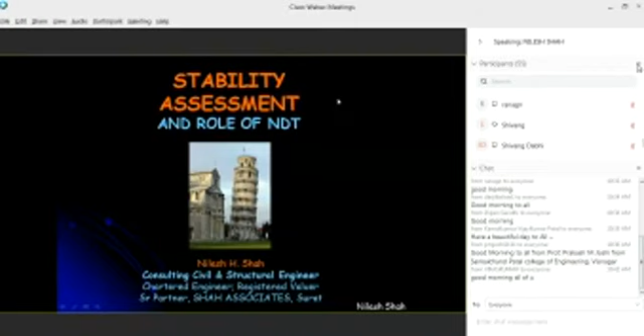So out of the 30% of the surface of the earth which is covered with land, barely 50% of that part is inhabited. So whatever efforts we are making for environmental conservation are restricted to barely 15% of the total surface of the earth, absolutely disregarding the 70% part which is covered by water. And the ecology of the ocean is very important. So I would like to convey to all of you: please strive hard to conserve the environment by conserving the water also, because it plays a great role in ecological balance.

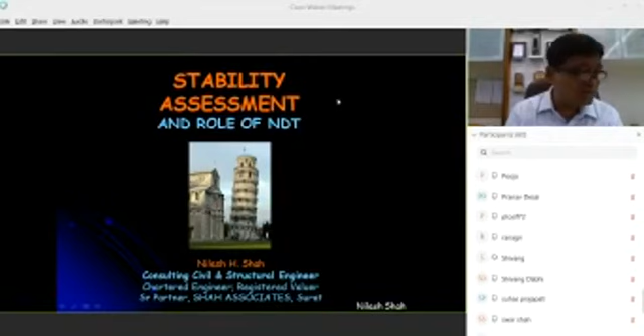Individually also we can start conservation of water so that we can have a good ecological balance on the earth. Global warming and other phenomena are related to the ocean. So if we try hard to contribute in whatever small way, I feel we should be able to conserve the water, the ocean, which covers 70% of the earth. More important is that life started in the ocean.

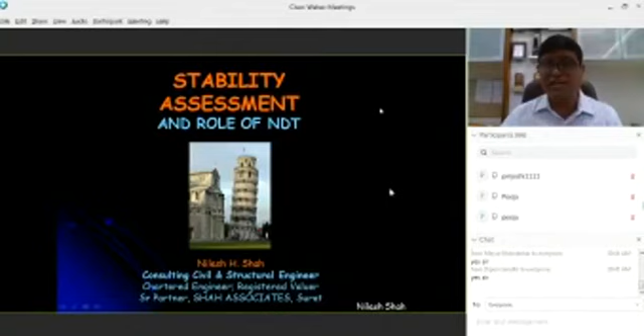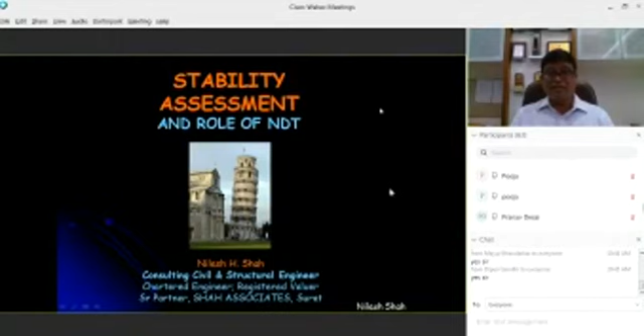So the first thing which I would like to emphasize is that structures also have emotional attachments. They are also like human beings. They get older like we get old. They get sick like we get sick. They also need periodic checkups. They also need regular treatments whenever they fall sick, and they may also be placed on life support. Structures will maintain good health only if we care for them. Otherwise, if we neglect them, they would be like a child which is not under the control of its parents. So it is very important that we focus on the well-being of structures during their useful lifespan.

Now, why is this type of assessment required for buildings? I have listed down some of the parameters. These are the phases calling for actual assessment of a building. You may call it stability assessment, you may call it structural condition assessment of a building. These situations will call for this purpose. One is sale and purchase of a building. Whenever I am going to purchase a building, I must try to find out, though the building is 20 years old, whether it befits the requirements of health and safety or not.

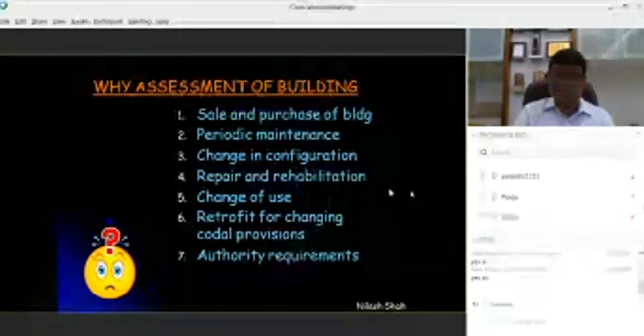Periodic maintenance: nowadays the government has also made it compulsory that any reinforced concrete building more than 15 years old should get periodically inspected every 5 years or every 3 years, and a certificate in the form of stability or structural inspection should be obtained, maintained in record and submitted to the local authority. I understand that all over Gujarat this is the scenario: any RCC building more than 15 years old should have a structural inspection every 5 years and submit a report along with a stability certificate to the local authority. I hope people from other states are also joining this webinar. I am sure the situation in other states would be the same.

Whenever there is a change in configuration, like people may want a horizontal expansion or a vertical expansion of the building, that is what we call change in configuration of the building. At that time also the assessment would be required. Repair and rehabilitation: over a period of time there is degradation in the materials used in the building. There may be a change of use, so under all those circumstances you would certainly need to assess the structural condition of the building.

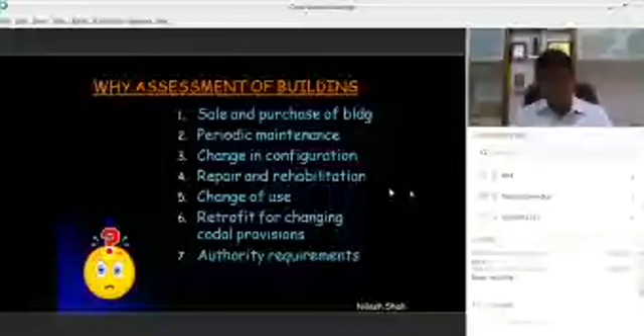Retrofit for changes in codal provisions. Though the building has not deteriorated, though the materials are performing very well as of today, they were constructed 15 years before, complying with the code of practice prevailing at that point of time. Now the codes have been revised, especially post-earthquake. There is a lot of emphasis on revision of codes for earthquake and wind, as well as IS 456. So current provisions of the codes will call for retrofitting of all those buildings constructed considering the old codes.

For example, if I just put it straightly before you, buildings which are constructed with M15 grade of concrete were correct at that particular point of time because M15 was accepted as a structural concrete. Now, over the last few years, with introduction of changes in relevant codes, the minimum structural grade of concrete has been declared as M20. So this certainly is a matter of concern for all those buildings which have been constructed complying to the old codes of practice.

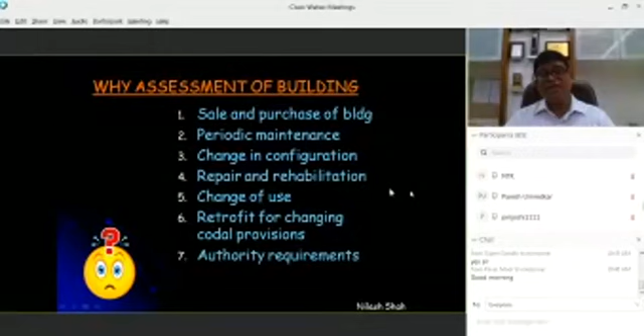And as I told you, one reason would be the requirement of the authority, because nowadays they demand that every 5 years you should have your building inspected and you must submit a certificate of stability. So now, coming to this particular aspect, a stability certificate. I have seen that many structural engineers were involved in this type of work and were demanded a certificate of stability, especially after a havoc situation was created or whenever some kind of natural disaster takes place.

I'm talking about the 2001 Bhuj earthquake, because immediately after that, a lot of people have been very much worried about how their building will perform, and the authority has also declared that we must obtain a stability certificate of all the buildings in Gujarat. So, what actually is this stability certificate, or what exactly do we mean by stability? That is what I would like to ask.

So, if you would like to share your thoughts on what is stability of a building, or what do we exactly mean by stability, you can write that in the chat box, or communicate to us in any other form. What are your ideas when we exactly talk about stability? What comes to your mind? So one is saying life expectancy. Avi Gandhi has said that. Other people can also share their ideas. When we try to assess the stability of a structure, what exactly do we mean by that?

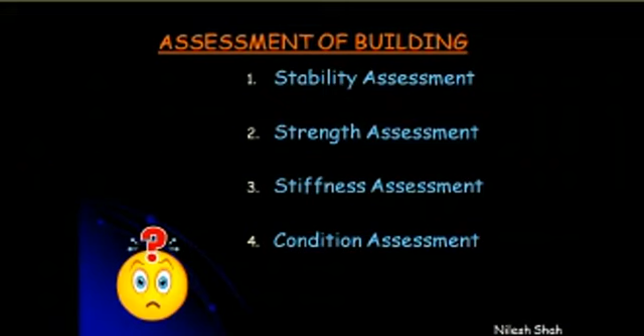So the general concept and the idea during those days was that a building has maintained its posture over so many years of time in the life which has passed for that particular building, and therefore it is stable.

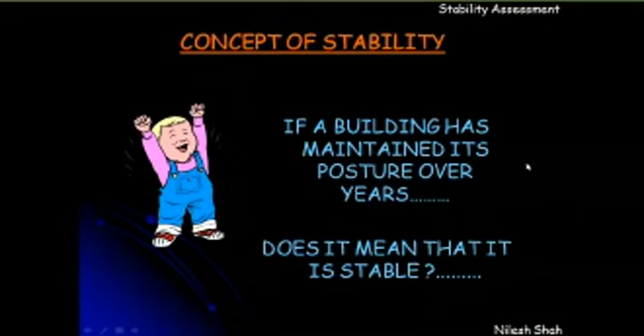So let us go and inspect the building. If there are not significant damages that you find in terms of cracks or dilapidation or kind of loose cover concrete or reinforcement rusting, go and certify the building as a stable building. Do we all mean that it is a stable building just based on these particular criteria and visual inspection? Then I have a very big question for you.

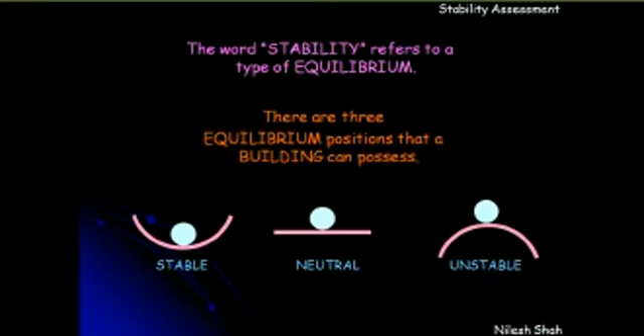No doubt about that. But the point of concern for engineers is that the equilibrium position which it has occupied is the third category, which we call unstable form of equilibrium. Right? So what we need to do is get rid of this unstable form of equilibrium because it is a great compromise with safety that we refer to in our codes of practice. So now just get back to the basics: what is a stable form of equilibrium?

So whenever a force is applied on a particular structure, the structure or its component will undergo certain types of deflections or deformations. And when the force is removed, it will regain its original position. It will regain its original geometry, right? So that we call a stable form of equilibrium, which is very much preferred in buildings at all times. That is what the code has said. And that is what we mean by stability.

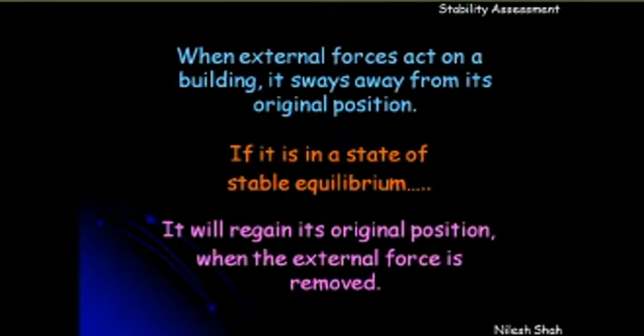When we say stability assessment, we mean to assess that the building would remain in a stable form of equilibrium throughout its lifespan and should not cross over to a neutral type of equilibrium or an unstable type of equilibrium. I'm sure that we are talking about something which is very relevant, very easy, very basic, very conceptual. But people would have missed it the way it is to be considered, or the way we will be discussing in the next few slides.

See, one should keep in mind that the building tries to occupy a new state of equilibrium whenever a force is applied to it, right? For example, if it is in a stable state of equilibrium and you apply a force, the building will remain in the stable state of equilibrium, right? Or it may cross over to a different form of equilibrium, which could be neutral form of equilibrium, or it may cross over to unstable form of equilibrium.

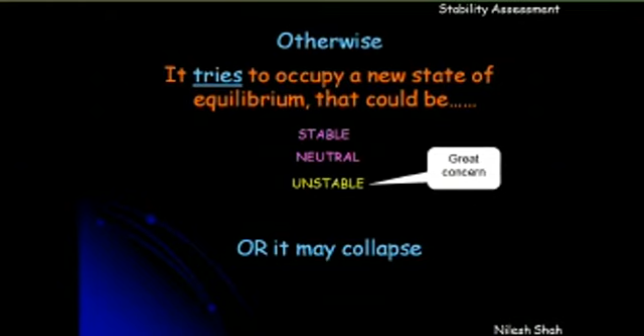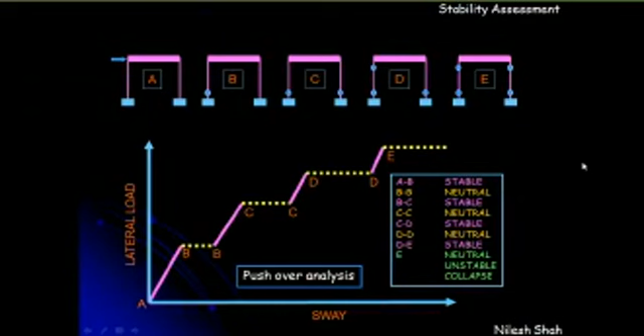So this is what I wanted to highlight: like us, who face highs and lows in our life, buildings also face different situations, sometimes high, sometimes low, in terms of equilibrium, and we must ensure at all times it remains within stable equilibrium without crossing over to unstable equilibrium, which is a great concern for all structural engineers.

Now, how does a building lose its stability? We are not talking about strength or stiffness of the building, we are purely focusing on stability. You must have come across several collapses of buildings, read about them in the newspaper, or seen photographs on Google. A building can lose its stability in two ways: one is local instability, the other is global instability.

Local instability could be in terms of individual members. I have seen several buildings where only a slab collapses. For example, in a 5-storey building, one slab component on the ground floor will collapse. That is local instability. Sometimes a drawing room slab on the 6th floor will collapse because someone was doing breaking work or making a flooring there. That 6th floor slab falls on the 5th floor.

Because of that impact, the 5th floor slab also collapses, and subsequently all the slab panels from the ground floor to the floor where the collapse initiated. But this still falls under local collapse because of local instability of individual members. It could be collapse of beams, slabs, water tanks, or sometimes cantilever projections. Cantilever balconies are more prone because they are subjected to weather effects, and deterioration takes place faster.

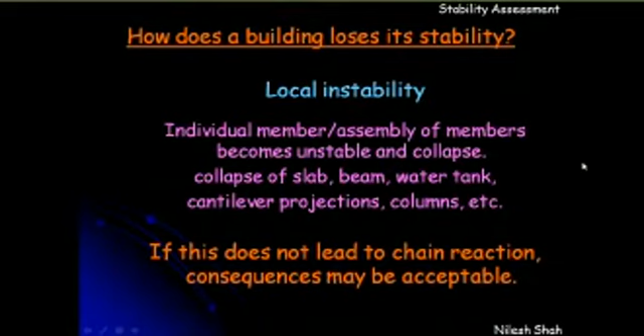But we have to be very careful about this, because we have come across buildings wherein the terrace floor water tank has collapsed onto the terrace slab, leading to collapse of the whole building, because sometimes the slab spans are so huge that it will also affect the columns which are on the perimeter of those slabs, and it will lead to collapse of the columns also, right? So this is one part, how the buildings can get the local instability.

The other is global, which is actually progressive collapse of individual members or assembly of members leading to collapse of the whole building. In fact, the two-dimensional frame which I had just discussed with you was an example of a progressive collapse analysis. And as you all would have heard the word pushover analysis, that was nothing but a pushover analysis. Whatever we have been doing has been only within the domain of elasticity and a linear stress-strain relationship.

But this pushover analysis will prove to you, including the graph which I had shown you, first phase, second phase, third phase, fourth phase, because the stiffness changes. So all actual behavior of a building during progress of a collapse would be non-linear, even though we do all our analysis assuming that stress is directly proportional to strain, or that everything follows the rules of elasticity. Because as soon as a hinge forms, the lateral stiffness will change.

As soon as the stiffness changes, the P-delta behavior will take on the nonlinear form in segments. So what we do is a non-linear analysis in segmental forms, and each segment of that analysis will pertain to linear analysis, and we'll stick to all the assumptions that we have made. So that was actually a basic explanation of the pushover analysis also, when I tried to explain progressive collapse to you.

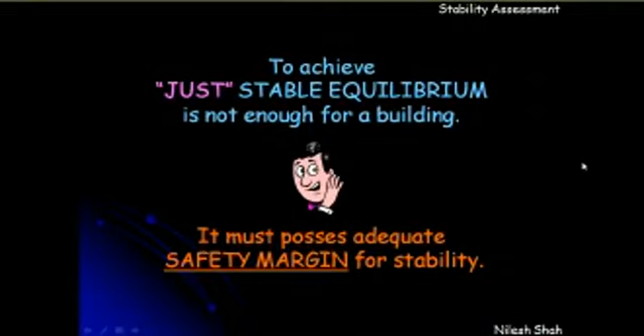How do we find out that a particular building is, I mean, currently authorities also demand, or academicians also say, that the building should be stable. Okay, but how stable it is? Is there a criteria to find out whether a particular building is more stable than the other building? It is there. The criteria is there in academics, the criteria is there in codes of practice, but seldom we try to find out the quantification of stability.

I bet with all of you, I am sure that all of you would be using all latest softwares like ETABS, STAAD, and Midas, and everything. Right? I don't have any doubt on the abilities of the computers, or on the software that we are using for analysis and design, which I also use. Right? But tell me the name of one software which tells you about stability. No software currently exists in the world which tells you quantification of stability.

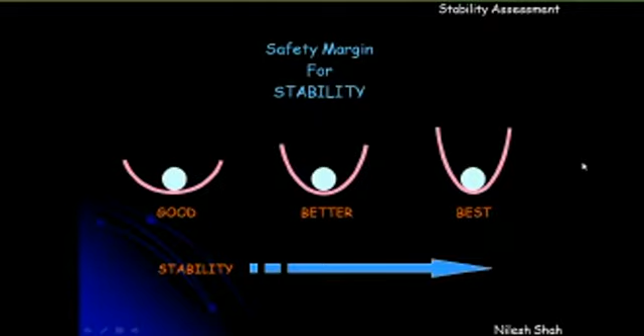Now, here I would invite you again to a brainstorming, can you give me some idea through the chat box how do we quantify the stability, or do you have any faintest idea of how we determine the stability of the building? Okay. Can you tell me? I see now there are 76 participants, and well, so Mehul has said overturning and safety. So he knows that these criteria are there. Okay, Avi Gandhi has said live and dead load, calculating live and dead load. I am waiting for a few more responses.

Can you tell me how do we find out through the codes whether the building is stable or not? In fact, it is an inherent virtue of a building. Only if the building is stable, then only we should proceed to analyze and design the building. So all the softwares that we have been using,

I think someone is requesting remote control of your shared computer. I think admin can do that. I am just disregarding that.

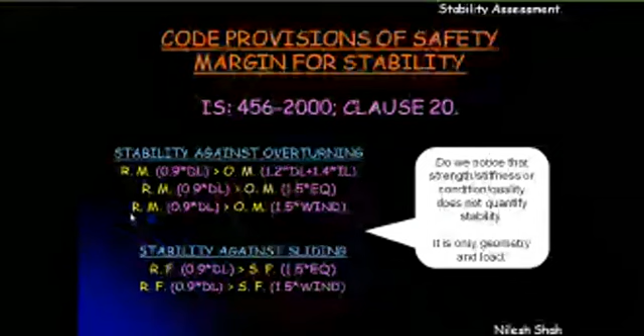Well, I can see Cheta Chandan Kumawat has said, I guess none, including myself. And wherever I talk about stability and I ask this question, invariably, everyone will say that no one has tried to find out this margin of safety which is available for a building for stability. Well, that is where the crux of the problem is.

I would also convey to all academicians or teachers who are participating in this lecture that before you start as a structural engineer, before you start doing any analysis or design, this data we must teach to our students, because I feel academicians are the pioneers of all these processes of analysis and design. So they must incorporate this in their syllabus. You will not find it in any book. Go through any RCC design book, any structural analysis book, no book will talk about this, that you need to ascertain the factor of safety that you have against stability in terms of overturning or sliding.

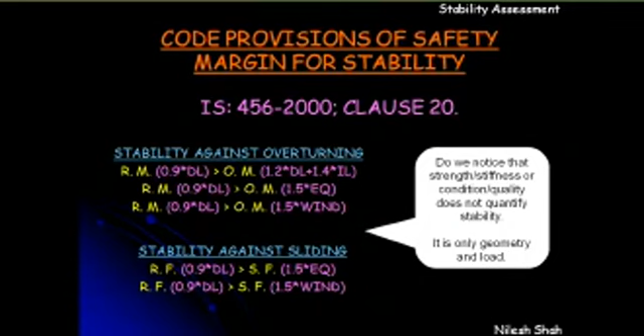It has been accounted for in the new IS 456. Yes, correct. For local instability, it has been there in a different form earlier also. But the point is, do we consider this before we start doing analysis or design? Perhaps not. I think we should be bold enough to accept that we have never done this. Again, I will request academicians that we should start incorporating this in the syllabus in terms of simple examples of how we find out the stability margin against overturning and sliding. It's not really difficult. It's very simple.

I have shown a ground plus 3-story frame here, which is subjected to gravity loads, could be dead load, live load, and a lateral load, right? And how do we find out the overturning moment? That is because of the lateral load, taken about the point where the rotation can take place. So it is this particular footing that I will talk about. And this overturning moment should be obtained by considering 20% more load because of dead load and 40% more load because of imposed load, that is live load, right?

For earthquake, it is to be 1.5 times earthquake or wind, and the restoring moment can be obtained which is provided by these gravity loads, right? In that case, we have to consider only 90% of that. And then we need to find the factor of safety against overturning, which is equal to restoring moment divided by overturning moment. Very simple. I think a person who has passed 12th standard with science stream can also do these calculations, right?

What I have shown you here is a two-dimensional frame. We can do this for a three-dimensional frame also, with hand calculations. But we have always disregarded this basic aspect of stability, which everyone should consider from now onwards in design. That is what I believe.

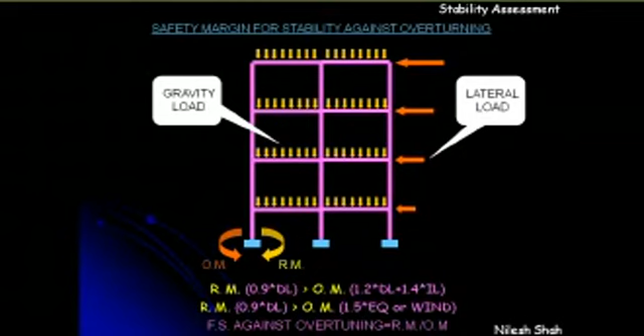Then what I wanted to emphasize here is, let me go back to this previous slide. The overturning moment is provided only by the lateral loads. Gravity load will rarely contribute in causing instability. It is the lateral load for which the stability aspect should be stronger, right?

So now let me go back to my earlier narration that people used to go to the building, see there are no cracks, nothing like that, and then certify stability. When they have not considered earthquake load or wind load, how can they just visually inspect the building and say that the building is stable?

In order to certify that the building is stable, one must ensure that the factor of safety or safety margins asked for overturning and sliding are calculated. Only after that can the certification process take place. That is only for certification of safety that I'm talking about.

So one important thing which I want to emphasize here is that gravity load will seldom cause instability. Well, not always true, because for simple determinate structures or partially constructed structures, the gravity load can cause instability, which I have seen in several parts. For example, self-weight of cantilever projections. If the props are not maintained properly, each cantilever projection may cause instability in a partially constructed structure or a simple determinate structure.

This is a very good example: this particular bridge was under construction in Surat. You may have come across this example. This is one span, which was a curved span of the bridge. As soon as the props were removed from this curved span of the bridge, it collapsed.

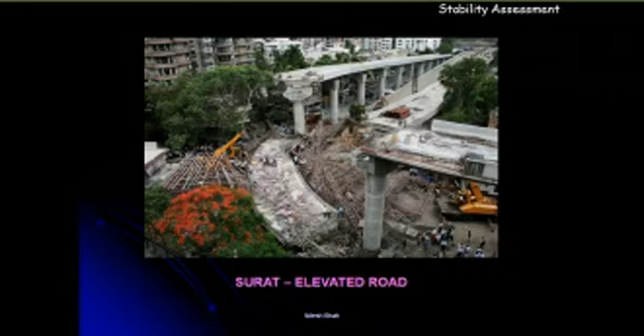The whole curved box girder fell on the ground intact, except for local damage due to the impact of the collapse, right? Otherwise, everything was in order. So this is one beautiful example where the stability aspect has been neglected by structural engineers. I don't say it has been done deliberately, but perhaps because no one has focused on calculating stability, as finding a safety margin for stability does not exist in any of the books or syllabus. Though it is provided explicitly in IS 456.

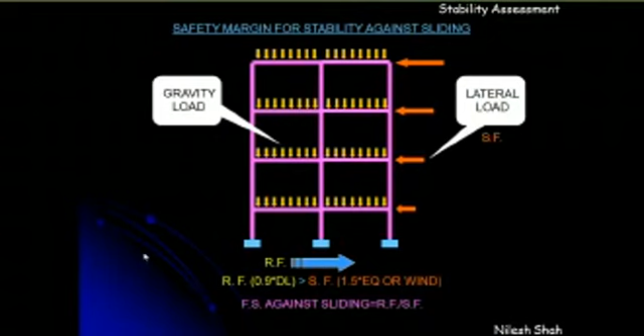Now this is the safety margin for sliding, which I hope is very evident, and we can easily understand that 1.5 times earthquake load will cause a sliding force, and the restoring force should be considered with 90% of dead load. Now again I should put before you a very interesting thing, considering the current provisions of the code. The two frames I am showing.

What we have seen up till now is the safety margin for overturning and sliding, right? And we must keep in mind that the provisions of the code do not ask for strength or stiffness or anything like that. The equations given are related only to loads: the intensity of load, the direction of it. So loads in general and geometry, because you have to find out the lever arm to get the overturning moment and so on, right?

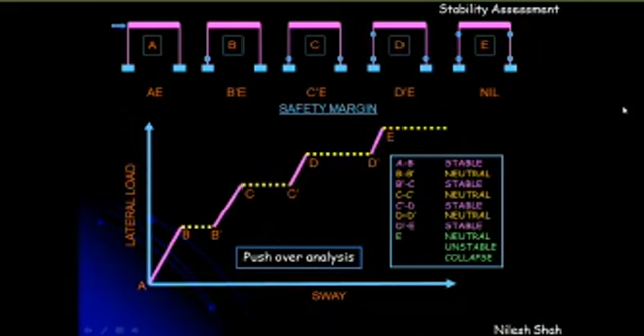Fine. So what I wanted to emphasize here is, though the geometry could be the same, though the intensity of load could be the same, it can have a different safety margin, which is not explicitly conveyed to all of us by current codes of practice. Something needs to be done on that front also, right? Okay. So I think we have done enough discussion on stability with a few prompts, kind of feeders, and the points of concern which I wanted to discuss with you, interact with you on those fronts.

That stability, what is stability? I think we had covered that. The basic aspects: it is a form of equilibrium. We should ensure that the building should always remain in a stable form of equilibrium, and certifying a building on stability criteria does not ensure that the building is safe, even though it could be in equilibrium. The building could be in equilibrium. It could be a different type of equilibrium apart from stability, right?

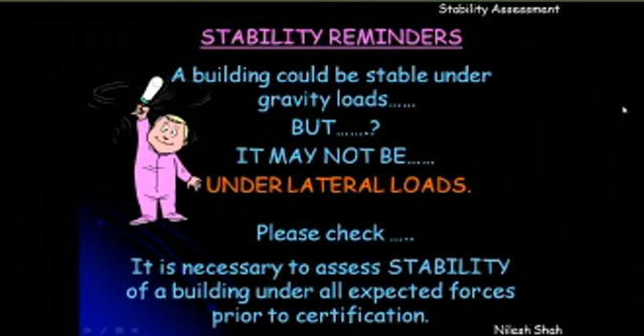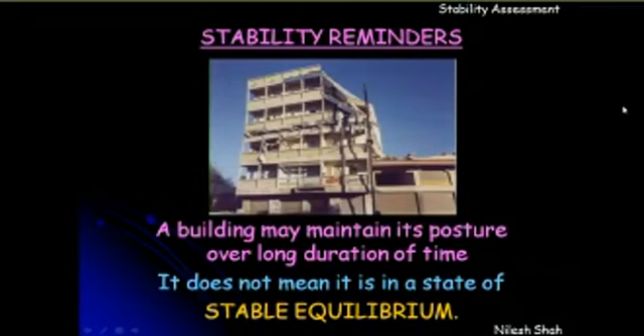So, but then you cannot say that it is in stable equilibrium. Okay, so only those buildings that possess a stable state of equilibrium under all expected forces with adequate safety margin are safe for use. Others are a matter of great concern for us.

Now, you would be thinking: how can a building topple without any effect on its strength or stiffness? Though the strength or stiffness could be fine, the building can topple. I am going to show you a few videos. I hope we have a lot of time now, at least 15-20 minutes more I think it is going to take. I'm going to show you one very interesting video of the collapse of a building in my own city, Surat.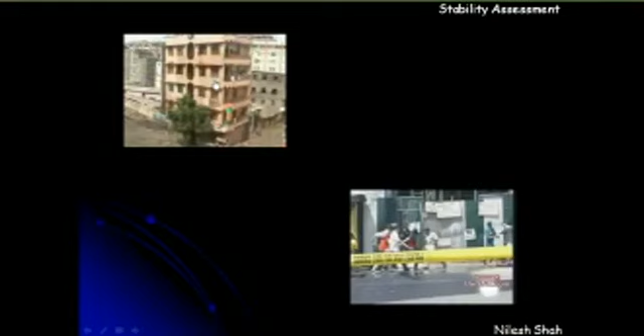Right, it's a building where no cracks were there, no damage was there, no deterioration was there. But people have captured a very good video. I have collated all those videos and prepared this video for you all to understand, because unless and until we understand the failure mechanism, we will not be able to analyze and design buildings. Because this is the process of learning from failures. So I hope you all would be able to see small insights.

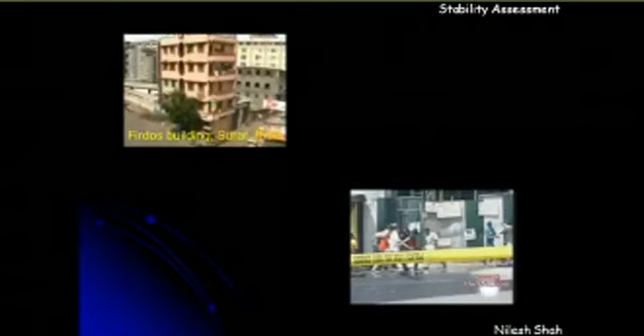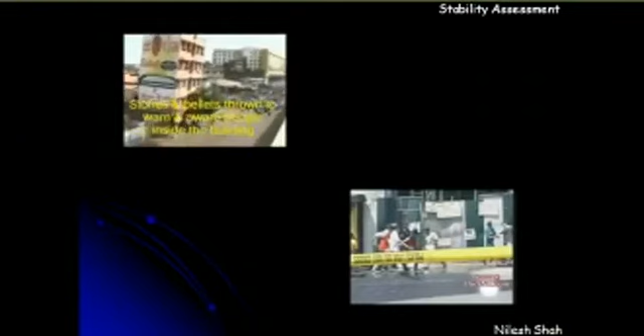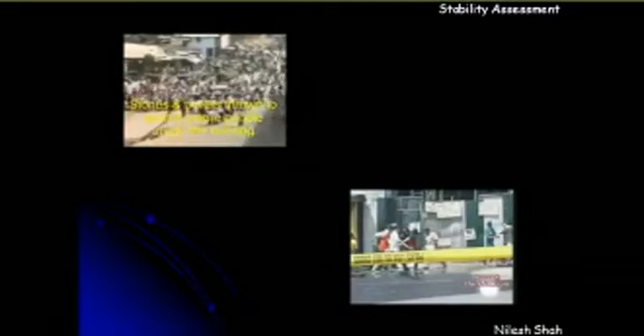It is the Firdos building. In the morning, it was normal, like all other buildings. At 8:30 in the morning, some passersby noticed that the building is leaning. So they warned all the people around that building and asked all the people who are staying in that building to come down. A crowd gathered. You can see this all started at 8:30 in the morning. Before that, it was perfectly okay.

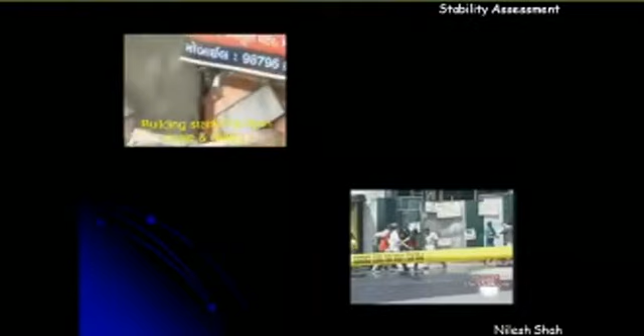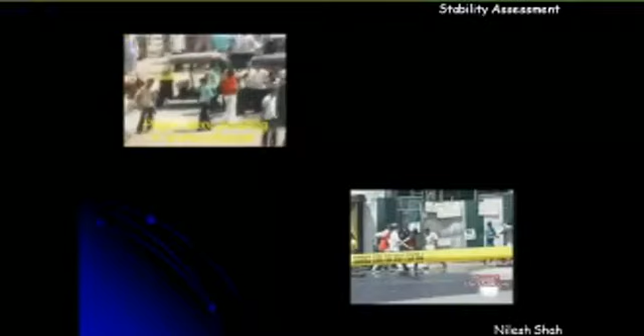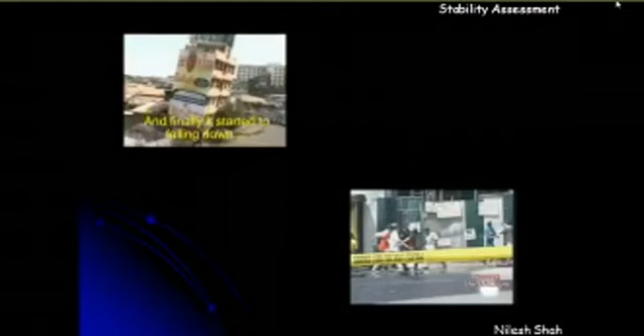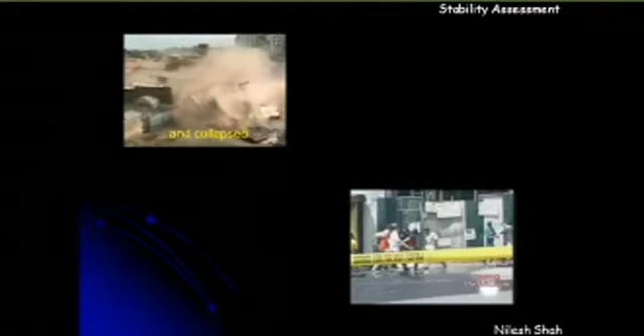Authority came into the picture. By afternoon, the traffic was stopped. Everything around that building was cleared. You can see that the building has leaned. Further leaning as the time passes by. This was at around 3 o'clock in the afternoon, and around 3:30, okay.

This was from very local, my own city, Surat. I also have this other video from the Philippines. Someone has written to expand the panel to show the video, but these are embedded videos which I think would be difficult to expand. But I have another video also which is full screen.

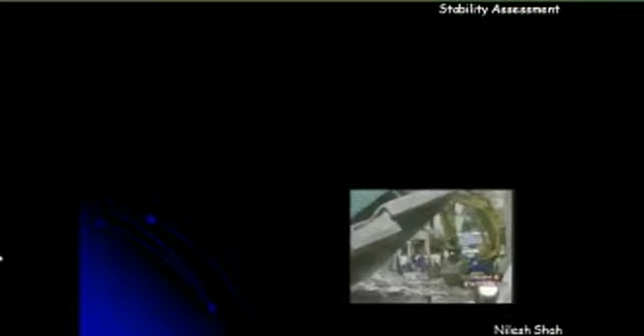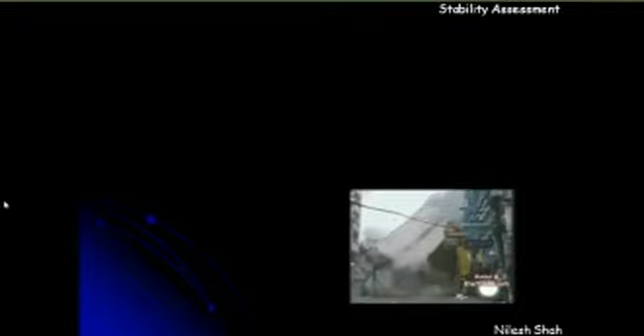Okay. Do you want to see this video in full screen? Then I will have to escape from this presentation and share another file so that I can do that, because these are already embedded videos in my presentation. I will show you one more video. Okay. And now this is from China, a very famous case of a building collapse.

Okay. So in all the three videos, what I wanted to convey to you was that, even the Chinese video that you had seen, we are very much afraid of China nowadays because of this corona, but I think it is a very good example. In the Chinese video that you had seen, the whole building overturned, and even after the collapse, the beam and column joints were intact. The windows were intact, right? Everything was intact. So it means that it has got adequate strength, it has got adequate stiffness, but it lacked in stability.

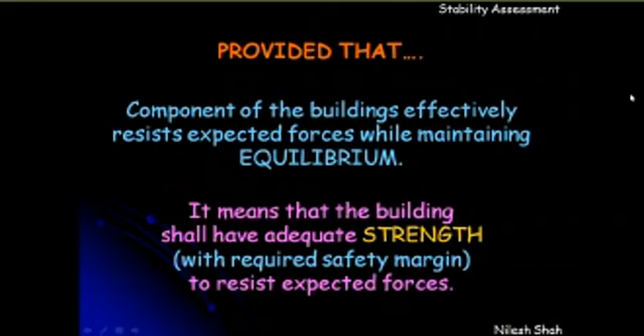Okay. So the higher the factor of safety, the more the margin for stability, and the more dependable the building, provided that components of the building effectively resist expected forces while maintaining equilibrium. It means that the building should have adequate strength, and the deflections or deformations within the building should be within permissible limits. It means that the building should have adequate stiffness, right?

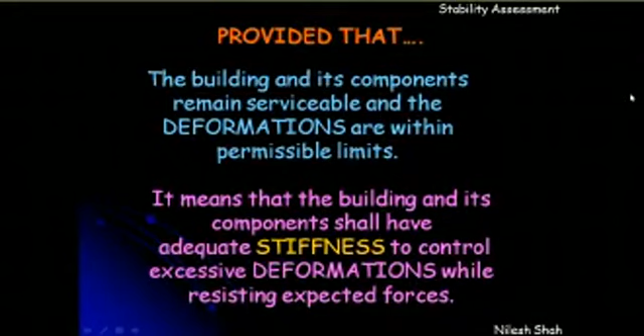So, in general terminology, we say that a stability assessment should be done. It does not relate only to assessment of stability, but it should also relate to assessment of strength and stiffness, because that also plays an important role in making the buildings and their occupants safe, right? So stability is a function of geometry and external forces, which I had already explained to you earlier, but the strength and stiffness part are not duly recognized in the code of practice.

Very important. When I was doing my MTech at IIT Kanpur, my teacher, Professor Dayaratnam, used to tell that as we breathe air, the building breathes three things. These are the basic things for a building to survive. One is stability, the other is strength, and the third is stiffness. So these three S are the most important for structural engineers, because our buildings are our child.

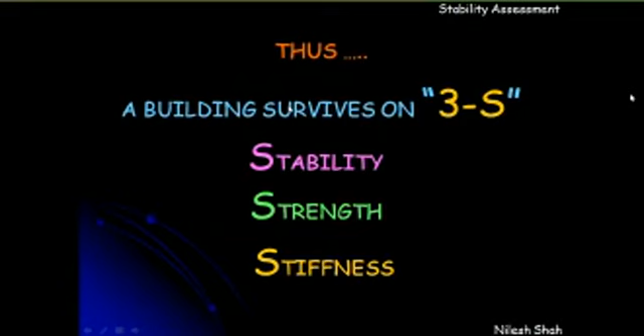Okay, our buildings are our babies, so we should care for them. And unless and until we provide good quantification of these three parameters to the buildings, I'm sure we remain more responsible for the performance of the building, good or bad, right? So these are three things which I will call roti, kapda, and makan for a building. Like roti, kapda, and makan are the three basic essential things for human beings, likewise stability, strength, and stiffness are three basic essential things for a building, which is roti, kapda, and makan for them.

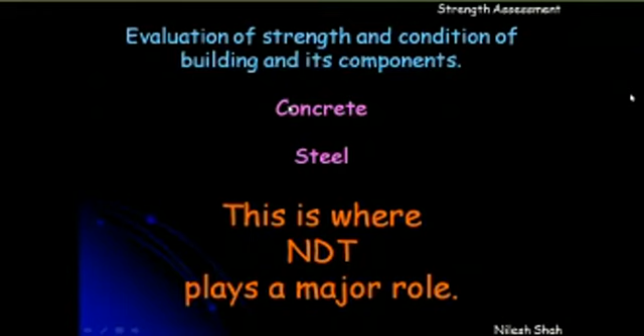One measure for stability is available, like the safety margin. Then what next is to be done? Next, we have to evaluate the strength and condition of the buildings. If you are talking about a concrete building, then we have to do that for concrete as well as steel, which are the main elements providing resistance to loads, right? So this is where non-destructive testing plays a major role. Earlier we had focused on the stability aspect. Now we will focus on non-destructive testing for evaluation of strength and stiffness, which are also important for assessment of the building. Okay.

I hope we have got enough time now. I think we will take another 20 minutes or so to pass through all these non-destructive test methods. Am I right, Darshan bhai? Is it okay that I can take another 20 minutes more, or the participants? Yeah. Okay. Fine. Thank you very much.

So now, after stability, we get back to strength and stiffness. First is strength. So how can evaluation of concrete strength take place using NDT? I am sure that many of you are aware of several methods available for evaluation of strength, which include the rebound hammer test, the ultrasonic pulse velocity test, and also the core test. Right now, these three tests are very frequently used individually. Rebound hammer is used very extensively everywhere you go, and people will say that yeah, we had done testing of it. What type of testing have they done? They have done rebound hammer testing to arrive at the strength of a building.

But before we consider the individual test of rebound hammer, I think we should know what it reflects and what the lacunas are in all these types of tests that we have been doing. Okay, according to me, the priority for testing of a building should start with the core test. Even IS 456 also says that in case of failures, you must do testing, and if everything fails, you must go to core testing. And there are certain acceptance criteria available in the code of practice based on which you can accept or reject the concrete. And if the core test fails, it proposes an actual load test, right?

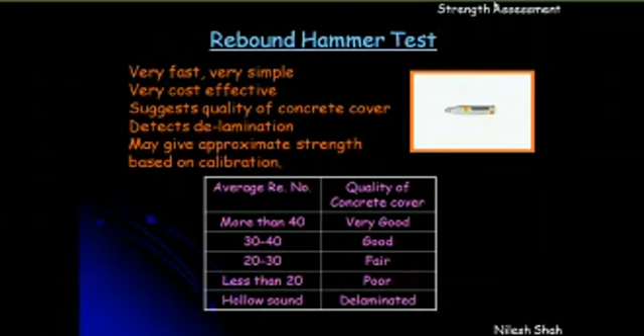I have seen vendors selling rebound hammer in 5,000. A good digital rebound hammer would cost more than 3 lakh. But I have seen people taking out these rebound hammers of Chinese make, which do not have any brand, any proven track record, and selling in 5,000. I have seen people doing rebound hammer test in 50 rupees, right? So that is a very sad situation, and I think the rebound hammer test should not be resorted to in concluding the strength of the concrete. It can be used only to get a relative idea or relative information, because there are a couple of reasons which I will tell you.

The rebound hammer relates only to the cover concrete. The cover concrete would have been affected a lot by several other parameters, weathering effect also. For example, carbonation is one of the things which makes your cover harder. If you do the rebound hammer test on a cover concrete which is already carbonated, there is all possibility that the results will shoot up by more than 50%. So even if the strength of concrete that you get is M25 or M30 on carbonated cover concrete, the actual strength of the concrete could be less.

Second most important thing which I would like to tell you is that rebound hammer represents only cover. Even if you infer strength based on the calibration curves provided by the supplier, it infers strength only of the cover concrete. It does not give you an idea about the core concrete. In all our design calculations, the effective depth that we consider excludes the cover concrete, right? So actually assessing the strength of a cover concrete is meaningless for a structural engineer. We must assess the strength of the core concrete, right?

Because in all calculations of capacity of beams or columns, there is a provision that we must consider only core concrete, and that is why the concept of effective depth is there, which excludes the cover concrete as well as half the diameter of the bottommost bar that we are providing in the beam, right? That is why I say that though this test is being widely used, I think it is irrelevant, and the use of this test should be very limited as far as structural engineer's point of view is concerned, or as far as inference of the results are concerned.

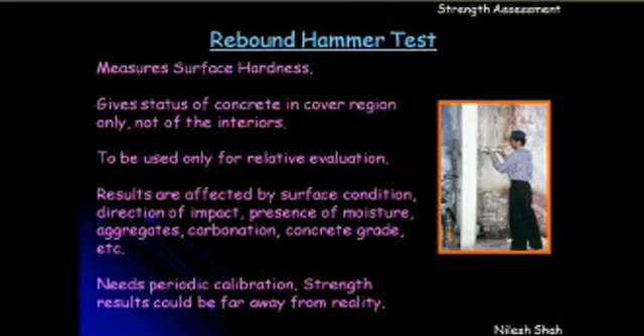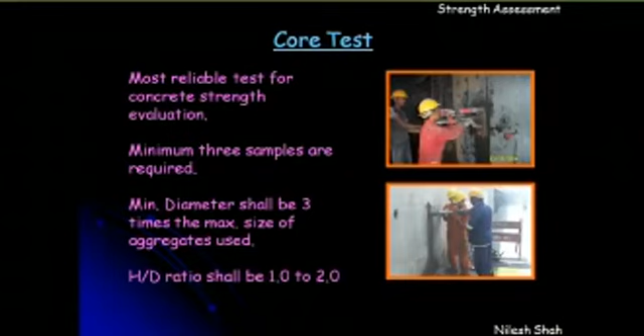Of course, there is certain research which has taken place for lower H by D ratio also, but that is not endorsed by codes of practice. So we must restrict to H by D ratio between 1 and 2 only as far as core concretes are concerned. See, I think core not only gives you an idea about the strength of the concrete, but it also gives you a feel about the interior or the core of the major structural elements.

I have put here a photograph of one of the cores that we extracted from a very famous building in South Gujarat. The building was constructed by a famous contractor, designed by a famous structural engineer, by a famous architect. And the core which you see has got a wood component. So during construction they may have neglected the quality practice, and the, in Gujarati we call lafa.

These are small pieces of wood which they use for centering purpose. Okay, so this was left inside the column. This core has been extracted from a column, and we realize that a very bad construction practice would have been followed, because the core came out with a portion of wood which you can see on this.

So core also helps in inspection of the interior parts of the concrete, right? So it helps in visual inspection of the concrete. It gives in situ density. It also gives you density of the concrete, which is also very important to identify whether the concrete is good or not. It can give you an idea on air void content in the concrete, and it definitely helps in acceptance and rejection. Okay.

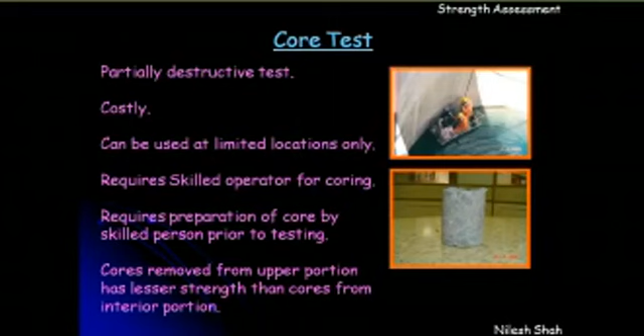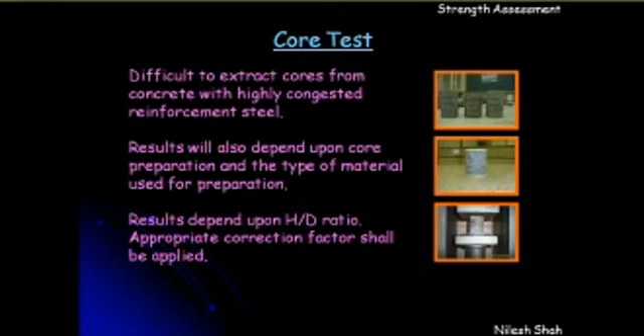There are several other aspects also as far as core testing is concerned. For example, if I extract a core from the top of the column, it may give lesser strength compared to the core which I extracted from the bottom of the column. Now, everything depends on the type of quality control which has been exercised at the time of construction. Well, it is very difficult to extract cores from concrete with highly congested regions. Results will depend upon core preparation and type of material. Here I have shown one core, surfaces of which are prepared by using a specific material. Results would depend upon H by D ratio and appropriate correction factor should be applied.

I had mentioned to you about these combination procedures, which I will skip currently. Following combination procedures may be preferred in their order of priority: core plus UPV plus rebound hammer, right? And core plus UPV, core plus rebound hammer, and UPV plus rebound. Well, this is just a hint that I am giving. I think this is available in several books also. In Bungey's book on non-destructive testing of concrete, you will find this. In several other books also, you will find this.

Combination of core plus UPV plus rebound hammer. So there is a relation between all three results. Some constant A multiplied by rebound hammer reading plus some constant B multiplied by UPV reading plus some constant C is equal to natural logarithm of the core strength. Now see. What are the benefits of this combination procedure? Because cores are expensive, they are partially destructive. It is not advisable to use core testing on each and every structural element that you see.

Usually, the practice which we follow, or many other people will follow, is that you first take 30 core samples, and before taking the core samples, you do rebound hammer testing there, and you do ultrasonic also. So you have got a set of 30 readings. Okay, so for those 30 readings, you have got rebound hammer number, you have got ultrasonic pulse velocity reading, and you have got core strength. And by using those 30 sets of parameters that you have, you can use this equation by regression analysis. You can find out the values of constant A, constant B, and constant C.

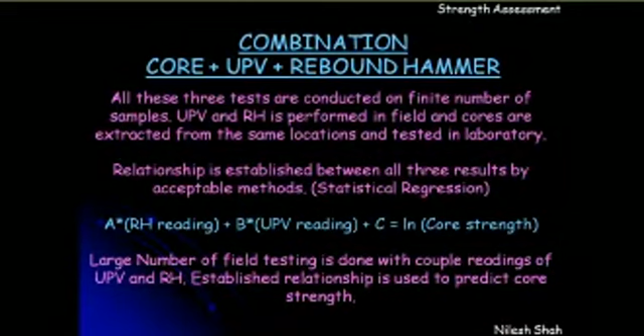I think it is a very interesting thing to do because here you can save the cost, you can save the time, and you can appropriately use the methods which are not universally accepted, like only rebound hammer or only ultrasonic. And a combination of three methods, of course, will reduce the amount of error. I should have been showing you a case study that we have done, but I think we will run out of time, so I will skip that. But let's see in the question answer section.

So at least 30 reliable strength results. This is my personal view. Someone can say we can have 40 readings, someone can say you can have 20 readings. No issues in that. Based on these 30 reliable core results, you find out the 95 percentile strength. What is 95 percentile strength? I think all of you know about percentile strength and characteristic strength of concrete: 95% of test results should be more than a particular value. That is called 95 percentile strength, right?

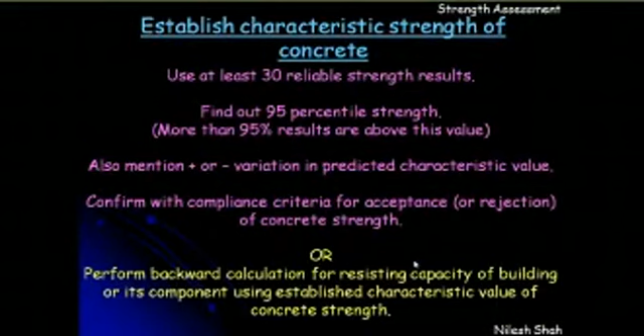Once you establish this 95 percentile strength, the characteristic strength of the concrete, for example, if the design strength of the concrete as mentioned on the structural designer's drawing is say 25, and based on this exercise the 95 percentile strength you got is say 20, then with that 20 you perform the backward calculations for the resisting capacity of the building. Based on these backward calculations, if you feel that the capacity is still more than the expected demand, then strength-wise the building should be okay, right? So this is the procedure for strength evaluation of concrete.

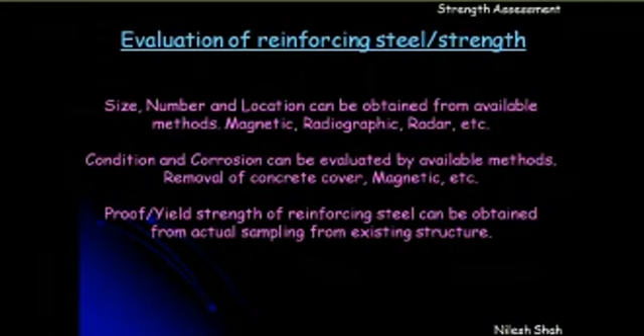Evaluation of reinforcing steel is still missing. We can cut an actual sample of reinforcement from there, test it and find out the degradation in strength of the reinforcement, right? Size, number and location can be obtained from available methods: magnetic, radiography, radar, etc. A lot of instruments are available. Condition and corrosion can also be evaluated by several methods. So proof and yield strength of reinforcing steel in situ can be established by these methods. So that is related to strength evaluation.

So we have the gross stability assessment, and we have seen how we evaluate the strength of the concrete. The building may comply with strength criteria, but what if its condition and quality are not good? So even these two parameters are not enough for assessment of the structural condition of the building, because one important thing is still remaining. That is quality of concrete. Structural condition assessment for quality of concrete can be done using several tests, wherein the ultrasonic pulse velocity test, I think, is a wonderful test and gives you a very good idea about the quality of concrete. And in our code of practice, we have criteria which classify the concrete into various categories from doubtful to excellent.

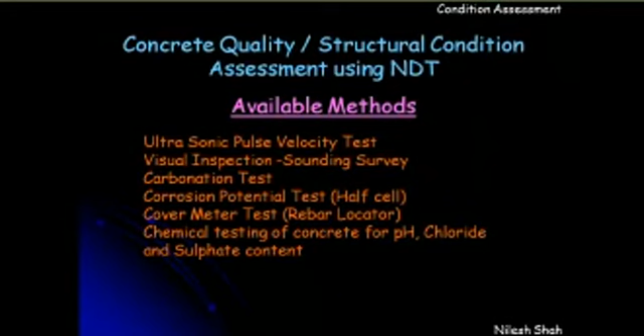Visual inspection is a good test. I will not say it is a test, but it is based on the experience of a structural engineer, and here the experience and seniority of a structural engineer would be very useful. Carbonation test, corrosion potential test, cover meter test, chemical testing of concrete for pH, chloride, sulfate: these things are related to durability. So let us go through these tests very quickly, one by one.

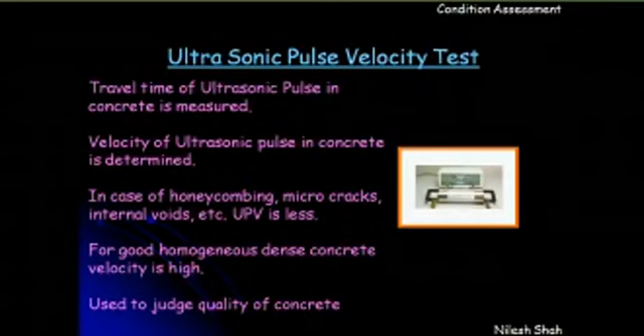So the ultrasonic pulse velocity test, I hope all of you are familiar with this testing. The travel time of an ultrasonic pulse is measured, from which the velocity is calculated, and criteria are available for interpreting the quality of concrete based on the velocity of the ultrasonic pulse through the test bed. For a good homogeneous dense concrete, velocity is high, and for honeycombed concrete, the velocity is low. There are three methods that can be used. One is the direct method, where two probes are placed on opposite sides of a structural member. There is also a semi-direct method, where two probes are placed on two perpendicular adjoining sides of a structural member.

And indirect method is both the probes are placed on the same plane of a member which is being tested. For example, if it is a wall, or if it is a slab, or if it is a column or a beam, whatever it is, right?

So I would here again emphasize that direct method of testing is the most reliable way of doing. So please try to resort to only direct method, because semi-direct and indirect method, though a lot of research has undergone into this and certain criteria is available, they have not been endorsed or standardized by codes of practice of the countries. But this direct method has perhaps uniformly been endorsed in the majority of codes of practice of different countries, right? So please try to resort to this direct method.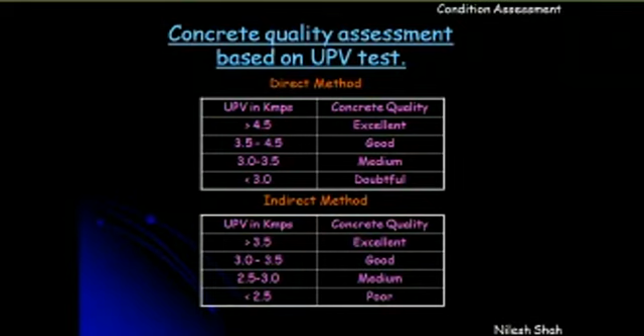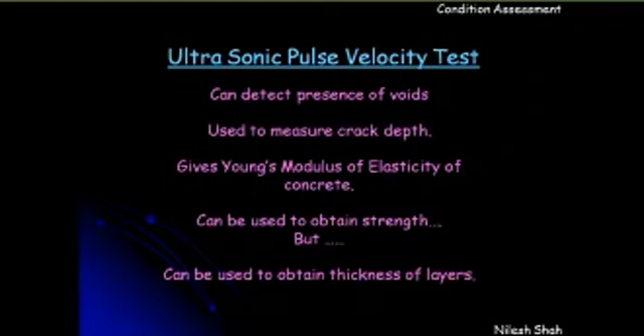It can detect presence of voids. It is also used very effectively to measure depth of the crack. It gives Young's modulus of elasticity. It can be used to obtain strength, but a lot of calibration and research is required in that case. Results are affected by so many parameters, which is presence of reinforcement, presence of moisture, temperature, age of concrete, types of aggregates which are used, surface condition, contact pressure, path length, type of transducers that we are using, that may also affect the results. Okay.

Now, condition assessments can be done by visual inspection. As I said, carbonation test. I think it is very interesting to know that carbonation has direct relation to durability of concrete and life expectancy. That is what people have come out with nowadays. And a lot of research has taken place indicating the depth of carbonation and relating it to remaining residual life of the building. In general, I understand that all of you know about what is carbonation and how does it affect the life of the building.

And with that preamble, I am trying to suggest to you that the depth of carbonation in the region where I live, the coastal region, should ideally have been 1 millimeter per year. That is, if the cover concrete of a column is 40 mm, and the natural progression of carbonation depth would be 1 mm per year, it means at least for 40 years the reinforcement in the column should not initiate the corrosion process. In beams, 25 mm cover, so it should take at least 25 years before the initiation of corrosion starts in the bottom reinforcement of the beams or the side reinforcements of the beams.

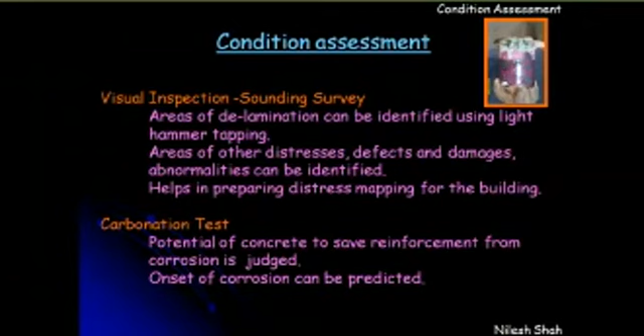So this is half cell potential test, which is used to find out the likelihood of corrosion in embedded steel. It helps in locating areas of corroded steel in concrete, and of course, it has got these technical things about instruments, that a copper sulfate half cell is used. It estimates the electrical half cell potential of the reinforcement, and readings are taken on a grid of 150 mm by 150 mm, covering the area of interest.

Same way, for ultrasonic and rebound hammer also, readings should be taken on certain grids. It is not that you take a reading only on one point and identify that this is good or this is bad. You must take readings on a grid. For example, for rebound hammer, I think a grid of 4 by 4 is very much ideal. So at one point of interest, you must have at least 16 readings. And out of those 16 readings, you have to find out an average, eliminating the offshoot readings which are more than plus or minus 15%.

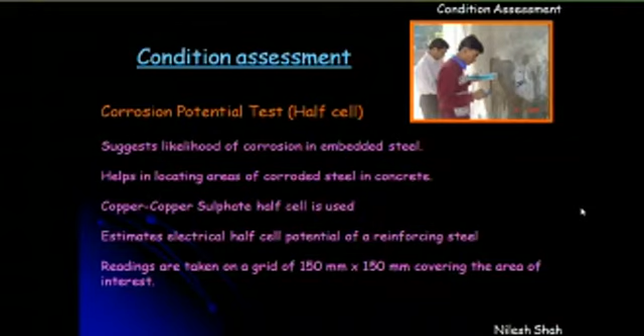And then you can identify whether this particular area of interest is good or not. The same way for ultrasonic, and the same way for half cell potential also, it should be done. So we should never rely on one individual reading. It should be a grid of readings that we take.

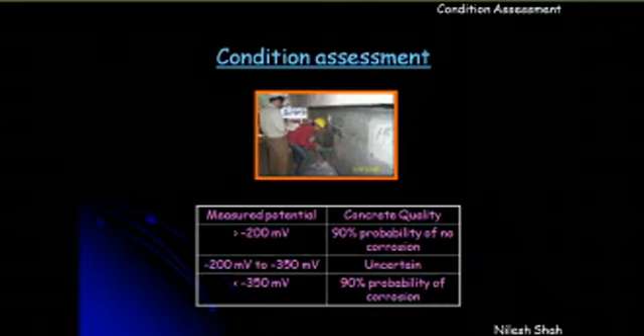These are the inferences of the condition assessment done by half cell potential on the likelihood of corrosion. If the measured potential is more than minus 200 millivolts, then there is a 90% probability of no corrosion. If it is less than minus 350 millivolts, there is a 90% probability of corrosion.

Right? A cover meter test is used to find out the diameter of rebar. The equipment which I have shown here is very old, and these are old photographs, but a lot of good equipment is available which gives you corrosion mapping based on these half cell potential results or the cover meter test, right? So it gives you the diameter of the rebar. It can also give you the spacing of the rebar. It can also give you the depth of cover that the rebar has.

And these are condition assessment tests that we should resort to, which is pH value. So ideally the pH should remain in the alkaline range and should be around 12 or more for a concrete to be good enough to protect the reinforcement embedded steel against corrosion.

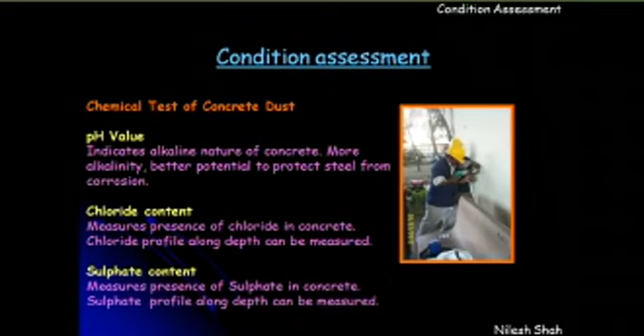The chloride content and sulfate content limits are prescribed in the codes of practice, which we should adhere to, because it directly affects the life expectancy of the building, and we must ensure that chloride and sulfate are within the permissible limits. Okay. So I think that was in a nutshell about various types of routine non-destructive methods. I have not talked about the advanced methods, but the routine methods related to condition assessment of a building as far as strength and quality are concerned.

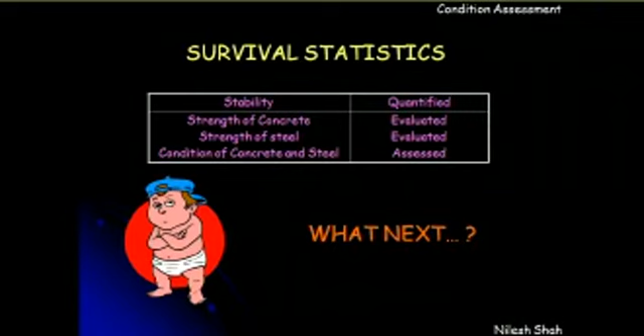Okay, so stability is done for a particular case. We have done stability assessment, we have evaluated strength, we have evaluated strength of steel, and we have found out that the concrete and steel conditions are also good in a particular building. Then what next? See, if all these criteria are satisfied, do backward analysis using evaluated material properties, which we had also done earlier after strength evaluation. Okay, and that was to establish that the strength demand is less than the capacity.

But now here we have to perform this backward analysis to find out that the deformations are also within permissible limits. Okay, because there are a lot of criteria set forth by codes of practice, again neglected everywhere. During analysis, we do everything. When we design a new building, we check that the drift of the building is within permissible limits, and the maximum deflection or the long-term deflection of a particular beam or column is within permissible limits.

But whenever we do that for an existing building, seldom will people try to find out whether the deformations with reduced strength or the new strength are within permissible limits or not, which is also an important thing to notice before we certify the safety of a building, right? So we have to do backward analysis and find out the deformations. That also includes lateral deformations, and see whether they are within permissible limits or not. Again, that should be followed for an individual member as well as the building as a whole, right?

So once you cross these three things, first stability assessment, second strength assessment, third stiffness assessment, and of course condition assessment, the quality of concrete and steel should be good. Okay, if all these four criteria are satisfied and everything is okay, we can say that the building has adequate safety margin, and then we can certify the building. If not, then it would require repair, strengthening or retrofitting. All these are different terms related to different types of processes that we need to follow to upgrade that particular building, right? So then we need to strengthen the building.

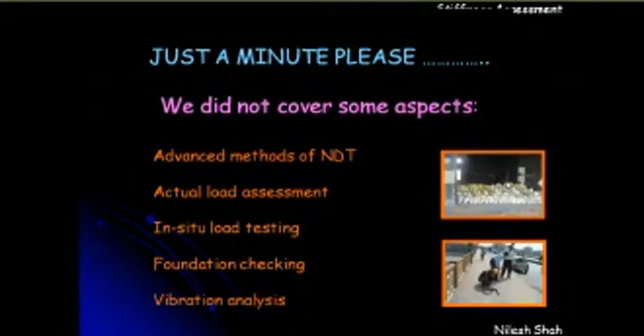Okay, so through this, I just wanted to establish that assessment of a building is not as simple as it is treated at present. It's a very systematic process, a very well identified process, which should be followed, right? And we must educate society about the complexities involved, because unless we educate them about the complexities, they will not give us the respect that we deserve.

I believe that almost all of you attending this webinar are civil engineers, or the majority of you are structural engineers. That is what I believe, because the topic relates to structural engineering. Do you feel that structural engineers get enough respect in society? I personally believe that structural engineering requires the highest level of intellect, analytical skill, logical skills, logical reasoning, logical analysis, everything.

Still, I should not say this in an open forum, but I feel that people have been submitting stability certificates and other things for a meager price of 5,000 or 10,000 rupees. Is this what we are meant for? I don't think so, right? We should be very proud of what we do. That is the first thing. We should be very proud of what we have gone through, what we have learned. Perhaps there was a time when all the toppers in the 12th examination used to opt for civil engineering. That was an era before me, right? Because civil engineering relates to everything in life.

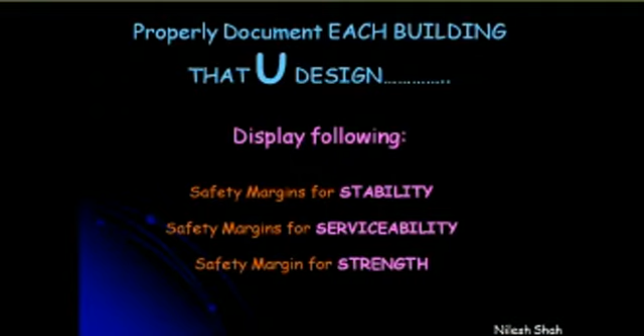So with this note, I think we need to understand our potential. Apart from understanding the potential of buildings, we need to develop a good self-esteem, so that for each building that we design, we can display the following things, which I have been telling over the last so many years, but no one does this: the safety margin for stability is so much, the safety margin for serviceability is so much, the safety margin for strength is so much, while what is demanded by the code of practice is this.